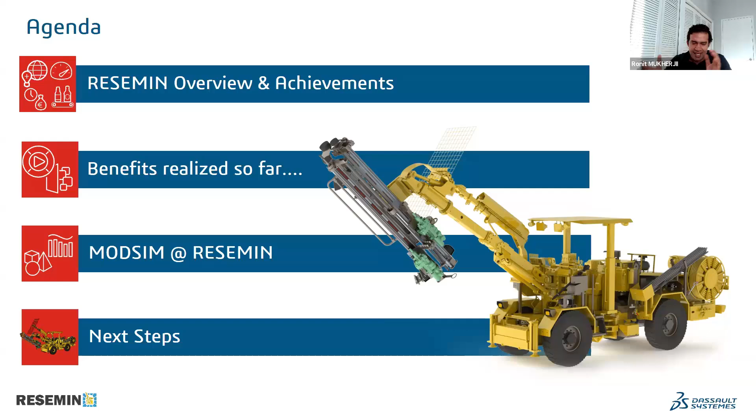What can I say? Resemin is a company here in Peru with about 1,000 employees between administrative people, engineering people, and manufacturing and assembly people. We have two factories right now, one in one part of the city where we cut the metal, make some welds, and paint the parts, and in another part of the city we have the assembly factory. We have the capacity to produce more than 20 machines a month, and we make sales all over the world. We have machines in Asia, North America, Europe, Africa, and Oceania.

We get 5% of the global market share.

In percent it's very low, but if you see the number of machines we're selling every year, it's very big for us. Five percent of the global market share - that's a pretty big number. It's not an easy number to achieve.

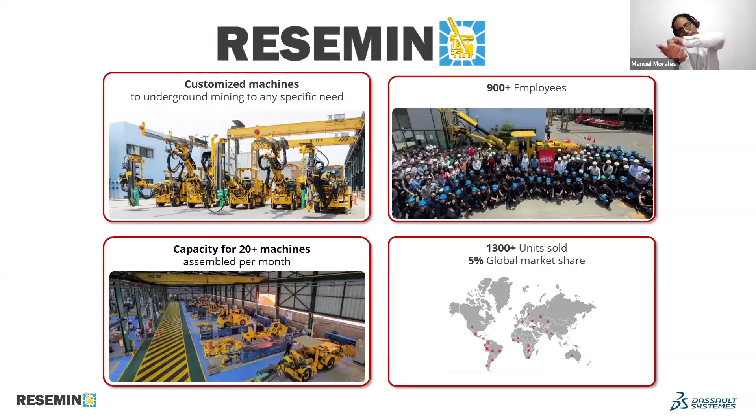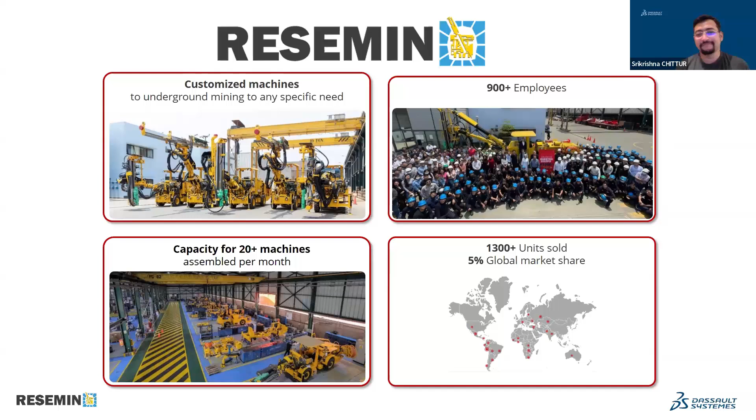And also these are customized machines, right? They're not identical to each other because you have different demands coming from different geographies. Yeah, our main sellings are customized machines. We actually have a standard, but we never sell the standard. All the time a customer comes and says, 'I need a long arm,' or 'the arm needs to drill this way,' some crazy things, and we have to develop these customizations for them.

Maybe tell us about your factory, Manuel.

I think his video is frozen. Hey Manuel, can you hear us? I think there's some issue with the internet connection. Maybe we can ask their employee in the meantime.

I can tell you this is the new plant, the new assembly plant, and they are producing more than 20 machines a month.

Manuel, are you there? Yep, sorry about that. So this is the new plant, right Manuel? Yeah, this is the new plant in Huachipa, Lima. If you can see, there are a lot of machines being assembled right now. Actually in this moment they are assembling some machines, and I have a lot of emails confirming the development of the machines.

You mentioned this factory line can do 20 plus machines at a time, building them. And you have to manage all of that - that's a lot of emails coming your way, man. I can understand that.

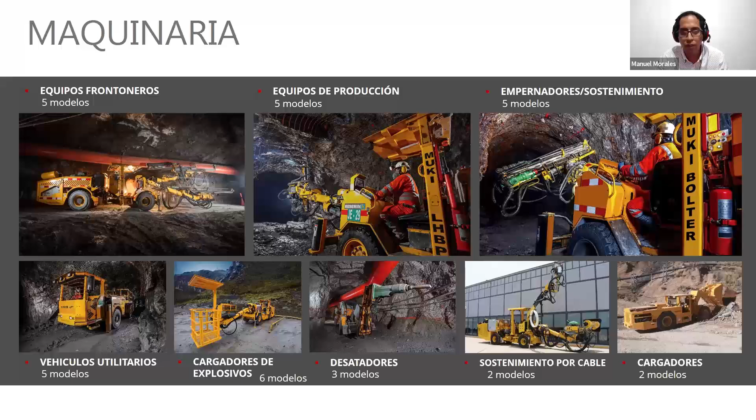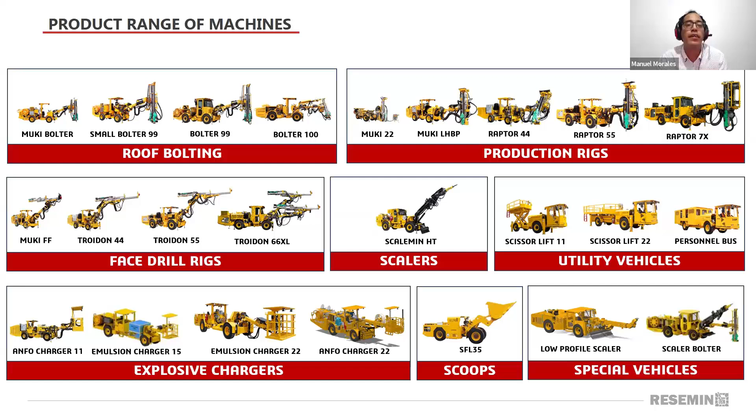If you see the next slide, please - you can see all the machines we are developing right now. This is our product range of machines. We have more than 20 kinds of machines. The next one is wider, showing our monthly production. Wow, that's a pretty wide range of machines you guys offer. Yeah, as I say, we have machines for every process that's done in the mine.

Maybe talk about the history of the company from a product development standpoint. For me this slide is my favorite. Manuel, tell us what's going on about your exponential growth in production - that is pretty amazing, especially in 2009. Explain just a little bit about that, please.

Yeah, we had very big deals in some years. In the first years of the company, we only made repairs and customizations of machines that were working in mines. But in 2002, one of our customers asked us for a little machine, and this was our first project of a real machine - the Raptor Mini, in 2002.

Then we started to produce some of these machines, and another customer said, 'Look, I have this machine that's bigger than what you manufacture, but I need one more similar to that.' So that started another project, making another machine. Then another customer said, 'I want this machine, but with this kind of work.' And with this, all the customizations started.

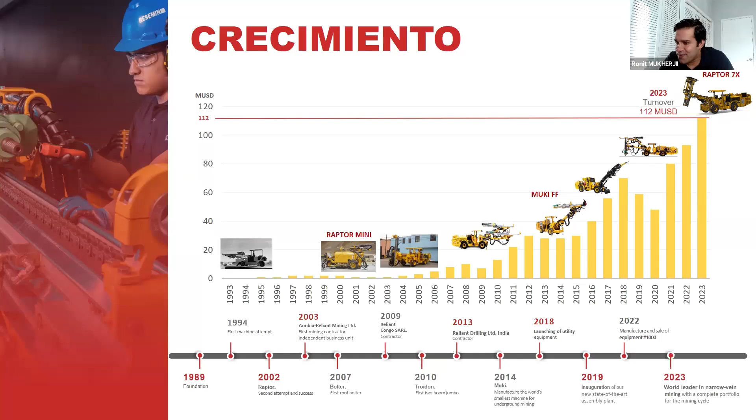I like that, look at their ramp up, it's like this. That's incredible. How was the growth of the company that quick, and the amount of engineers you have to hire? It's great to see.

We'd love to talk a little bit more about what happened when you adopted those simulation tools and SolidWorks tools, and how that helped. We'll deep dive into it a little bit later.

Tell us about your certifications and patents, Manuel. Yeah, we have some certifications in order to sell our machines in other countries. We have certifications of quality, of security of our machines, and operability of the same. All of these certifications are asked for by our customers in order to operate in some mines and in some countries.

Think about this machine: we have to make sure that the operator is still alive in all the work that he must do. I don't know if you remember, in Chile there was an accident in an underground mine. There was an earthquake, and the rocks dropped over the operators that day. The main idea is that the operator can still be alive, still secure, and make his work efficiently. That's important, human factors, making sure we are alive when we use these types of tools.

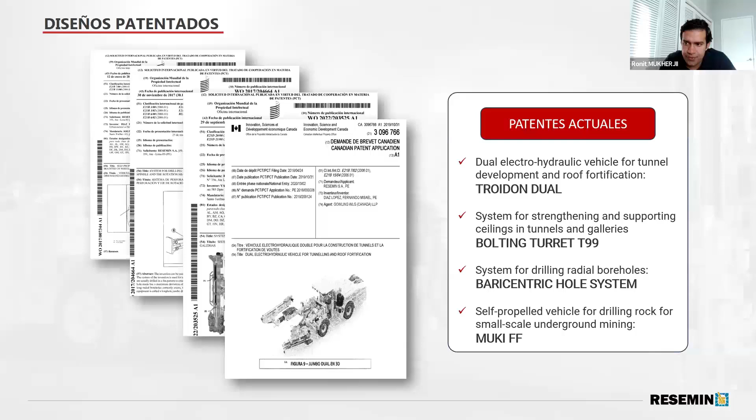That's important. Yeah, in order to get this kind of machine, and about customization of our machines, we have some patented designs. The most famous of them is the Muki FF.

This is the smaller one in the world, with just about 1.5 meters of height. So it's for very small mines, and this responds to the ask of many of our customers, not only here in Peru, but in Mexico, North America, and in Africa too.

Is the Muki FF the best seller out of your list of items? Is that the one that sells the most? Yeah, one of the best selling.

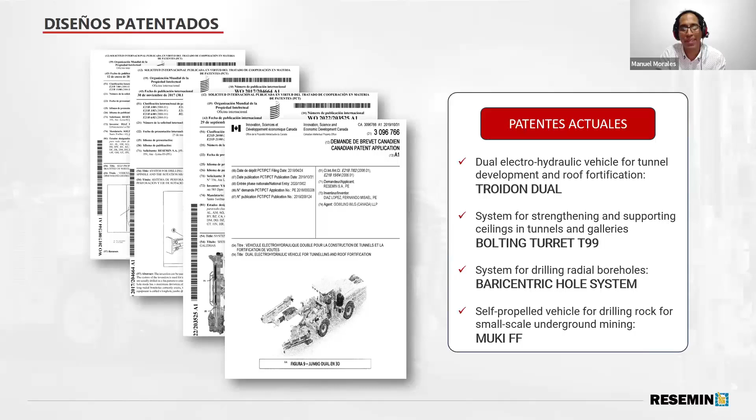Very cool. Can you tell us a little bit about your team? Yeah, in the engineering team, about 20 years ago it was only 2 or 3 people making some drawings in the beginning of the company. 10 years ago, we grew to about 10 designers. And with the growth of the company, the department grew too.

Right now we have 18 mechanical designers, 15 electro-hydraulic designers, 5 structural analysts, 3 bill of materials makers, and 2 people in codification. We have a lot of people working not only with the designs, but with the managing of the data too.

That's a packed team, Manuel. And I'm very curious, you said that 20 years ago there were 2 designers doing 2D CAD drawings, and even more, like in 2006 was when your first experience with SolidWorks or CAD was happening. From then till here, what does that journey look like for you? How did you start incorporating those tools and how did that help you? I'd love to hear a little bit more about that.

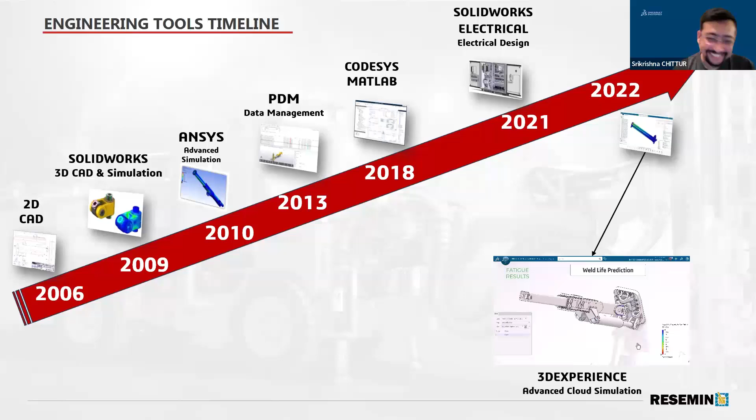When the complexity of our machines started to grow, the complexity of our tools had to grow too. There are 2 main tools for a mechanical designer and mechanical analyst in the daily work. One of them is the software, and the second one is coffee. So let's focus on the software.

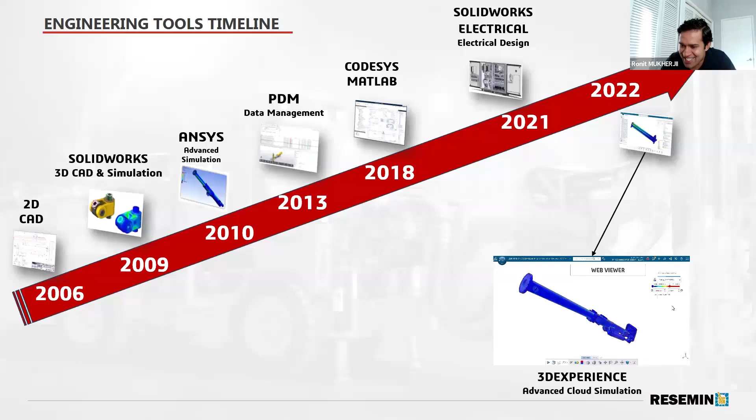I thought we were mainly going to talk about coffee, given how good the coffee is in your region. Yeah, I mean, we can talk about coffee too, guys. It's really good.

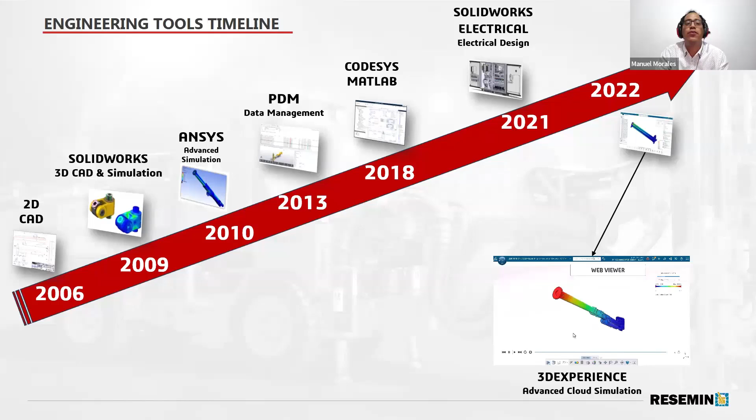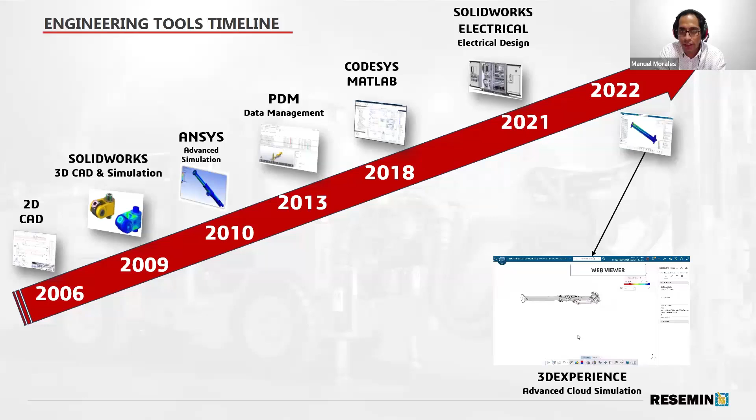So in 2009, we started to use SolidWorks 3D because we needed to put our ideas in a better way than only 2D. Working with drawings, it was very difficult to explain to our boss, to the CEO, how the machine starts to work. When we started to use SolidWorks, the way we communicated information to the other departments of the company got better.

Then we started to realize we're not only copying one machine, we have to develop a model of our own. At this point, we started to use simulation tools. Some years ago, we had ANSYS working in the company, but started to see that we needed more efficacy and we needed to be faster to get the results.

So we started to work with SolidWorks simulation in order to only make the modifications and rerun the analysis. This was a very, very fast way to develop our models.

At one point in our history, we had all our information only in a machine that worked as a server. It was a machine below the desk, if you remember that desk.

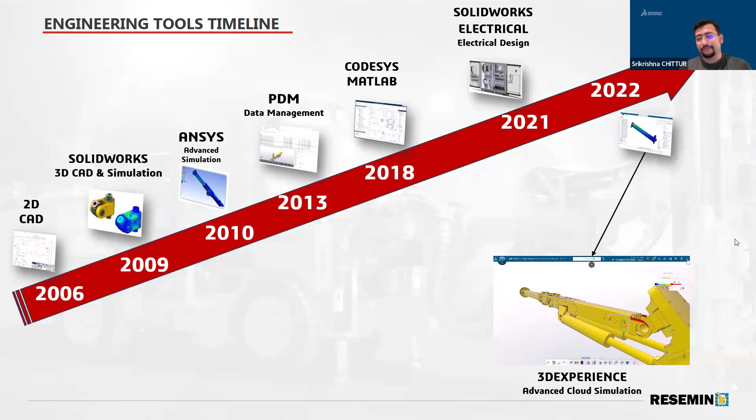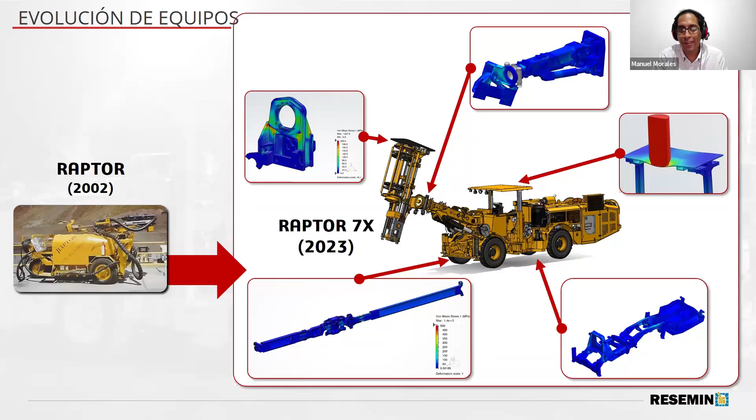Moving on, we could talk about one of the favorite pieces of equipment at Resemin and how it has evolved over the years. I love that name. The CEO of our company loves dinosaurs, so he took the names of some dinosaurs to name our machines.

Raptor is one of our most famous machines. The first image you see is the Raptor. Our first Raptor is a 1 meter height machine. It looks like a cockroach, but now we are making very complex machines like the Raptor 7X that you are looking at on the screen.

Actually, this animation of the machines turning is made with SolidWorks Composer. I was about to ask you that question. Yeah, all of our data and information is made in the platform of SolidWorks.

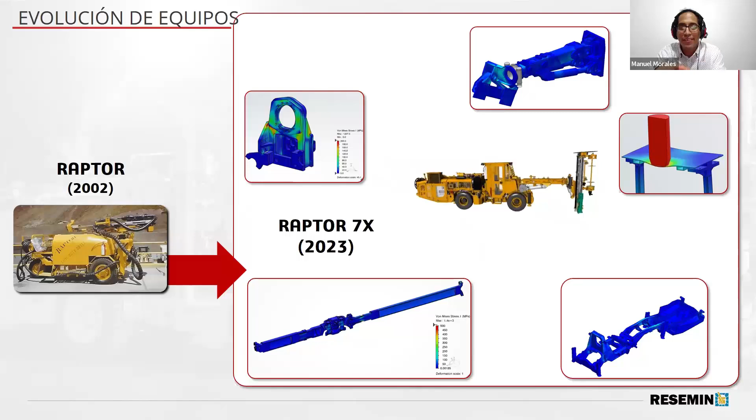With this machine, we have not only the most resistant design, we have electronic development, electric development. There's a lot of work from a lot of people in this machine. It's the biggest machine that we have right now in the development area. It looks like a transformer. I like the name, I guess something like that.

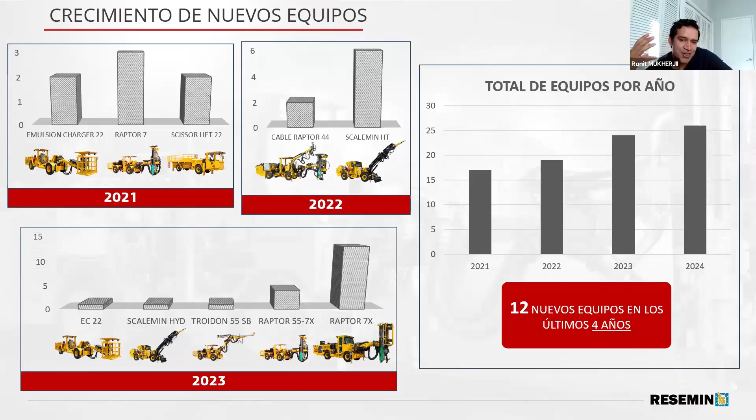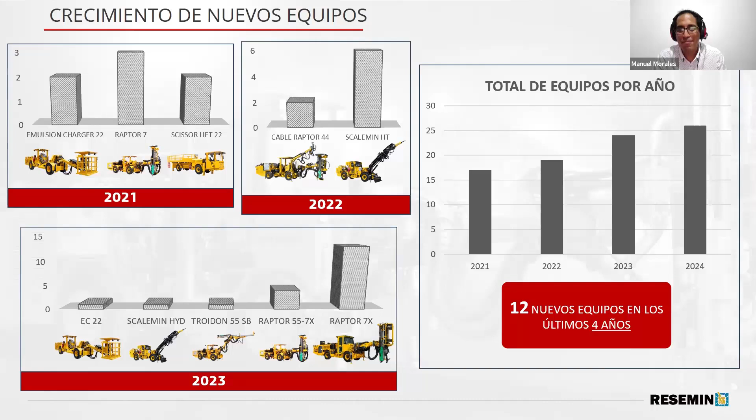Shurina, you know what I'm thinking? The CEO of Resemin is such a fan of dinosaurs, he's actually making all this machinery to go find dinosaurs inside, and this is just a ploy. That's the secret agenda, secret vision. Maybe one day.

Now I'm curious to ask the million dollar question we always ask all of our champions. You showed in your history the progression of product development. Initially there were some standalone simulation vendors and tools that you used, and then you switched to an integrated approach with SolidWorks simulation, primarily going with Dassault Systemes for simulation. What were some of the key reasons for going with this approach as opposed to a standalone point simulation tool, which might be extremely good at what it does, but why choose either SolidWorks simulation or 3D Experience Works?

First, we are not stopping to use standalone tools. We still working with standalone tools to make minor works. For example, I have to make a new support for a tank, and I have a designer working on the simulation of this component with SolidWorks. We don't need the power of cloud computing for just one support - it's like doing surgery on the heart of a bee, it doesn't make sense.

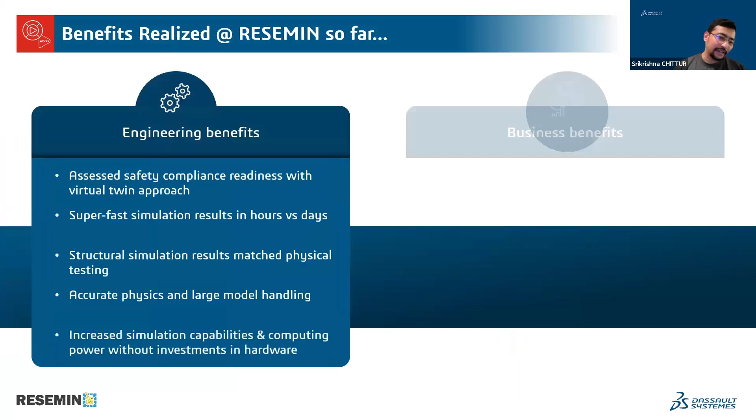Maybe we can take this opportunity for you to quickly tell us about some of the engineering and business benefits that you wanted to share with our attendees.

Yeah, as I said before, the main engineering benefit is that we have results in less time - very complex results in less time, and that means for the company less money spent on prototypes and physical tests.

For example, an FOPS test is about $8,000 to $10,000 for each physical test, and that's only the certification, but we also have to manufacture the components for this test - that's about another $10,000. So we're talking about $20,000 for only one test. Imagine if I have to make 3 or 4 physical tests for one machine. It's very expensive.

I'm imagining that because this is a certification test, you cannot fail at that certification test, right? Because if we fail, that means your time to market will take much longer, and you will lose maybe your business, right? Yeah, it could be 2 or 3 months more of development, and for our kind of customers, this time is very dangerous.

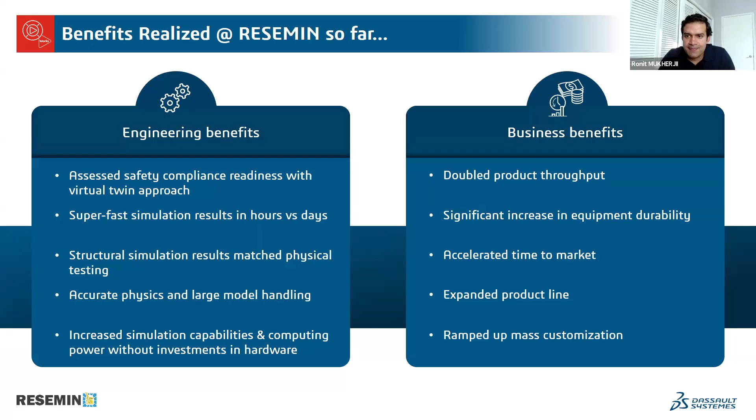Great, that's great. So just to validate, in terms of numbers - what Manuel was saying earlier, even if it takes $20,000 per test, instead of 5 tests, if you do one test, you've already saved $80,000, and that's just for one machine. There are so many machines being produced by Resemin, so it's a big multiplication factor. Yeah, absolutely, that's a great point.

Okay, speaking of safety, maybe we can quickly discuss how the unified modeling and simulation, or ModSim approach, has been adopted at Resemin, starting from requirements and collaboration and modeling and simulation. Tell us about the key requirements that you always like to talk about, which are critical to Resemin.

Yeah, for us, it's very critical to get components with good durability.

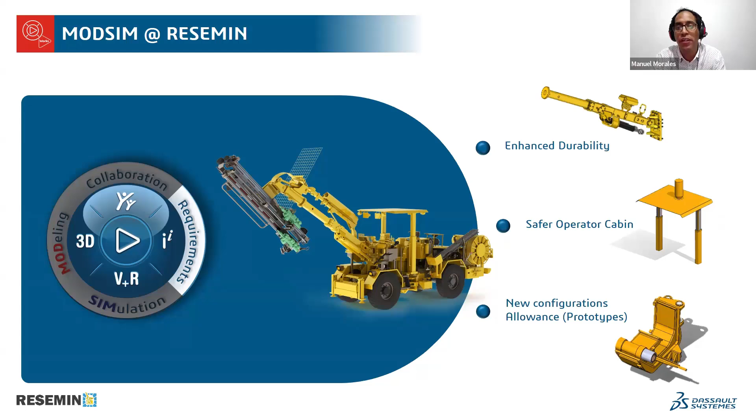Make the operator safe in our machine, and try to get new configurations in order to customize the machines to our customers. This is our main point of work for us in the engineering department. If you see the next slides, we are doing this with some kind of simulations, with linear statics, with durabilities, with optimizations, in order to get a...

Like we lost you there. I guess, right, as we were saying, in order to do that. Sorry Manuel, we lost you there for one second. Oh okay, I was talking about this.

That national holiday internet problem that happens everywhere. Everybody is watching Netflix at this time.

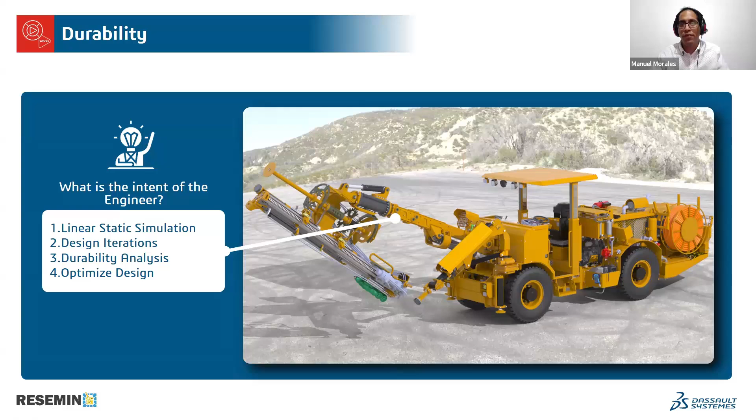Exactly, the complete system to the analyst. So can you hear me well? Yes. This is also nice, this is like one of my favorite slides.

And to answer Francisco's question as well, here's a physical test that we're doing. So of course we recommend running the simulations, bring the iterations down, we'll do one or two physical tests, and you have a working product. Tell us about this particular case, Manuel.

This driller machine, with this we are testing if the entire arm is ready for the work of the driller. The driller is shooting the rock with 3 tons, 48 times a second. Imagine that power in one driller, and the structure resisting this work, not only here on the surface, but imagine in the mine, when there are rocks dropping over the machine - very hard conditions for the machine.

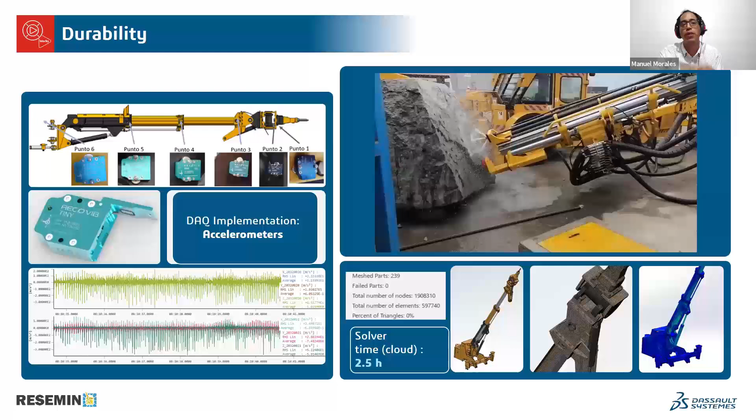So we have to get a very safe component. For this kind of simulation, we are using some sensors, accelerometers, to get real-time information about accelerations, and put that information in our simulation tools to get more realistic results. So this is why we are very confident that our first development is okay.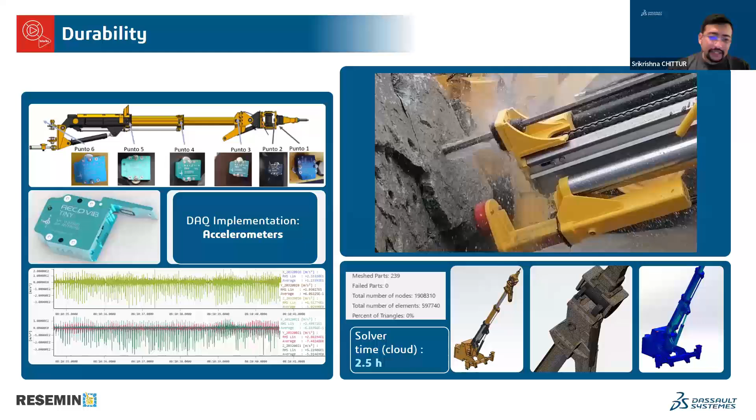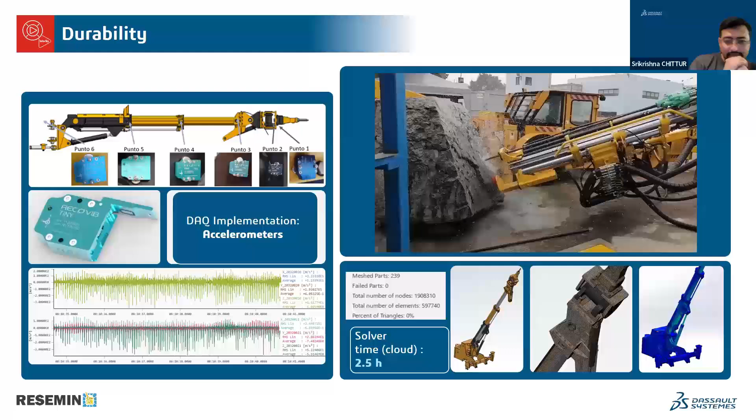So you're taking this real world data from these accelerometers, the loading data, and then applying it onto a linear static simulation to get a sense of how long the product is going to last - what is the life of the product? Right, exactly. And in a solver time of 2.5 hours, that's insane.

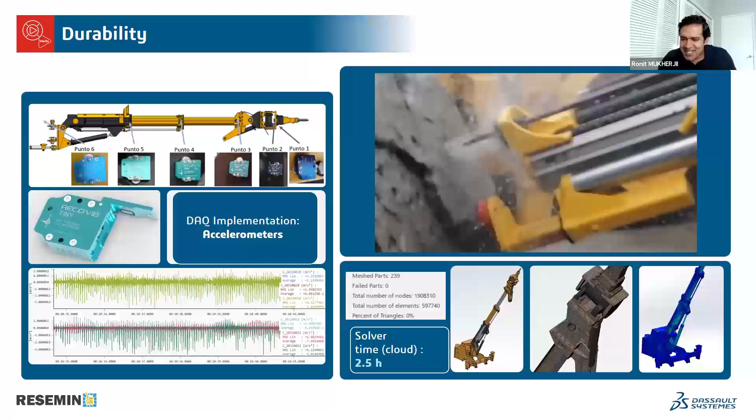I was just looking at the number - that's like 600,000 elements and solving in like 2.5 hours. That's not bad, that's pretty good.

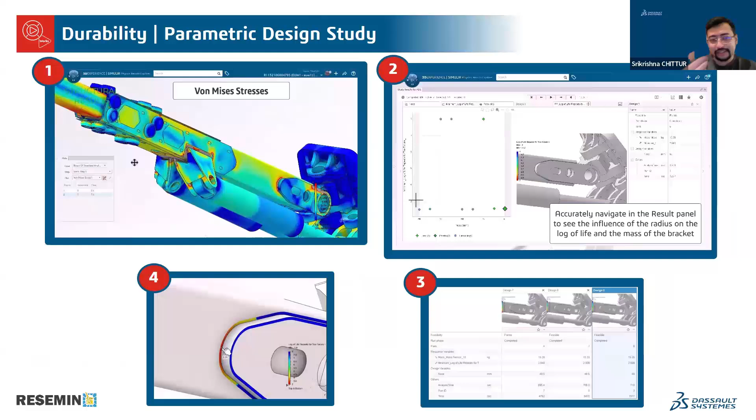And you also do a lot of parametric design study, right? Tell us about it. Sorry, you also do a lot of parametric design studies, right? Optimization studies.

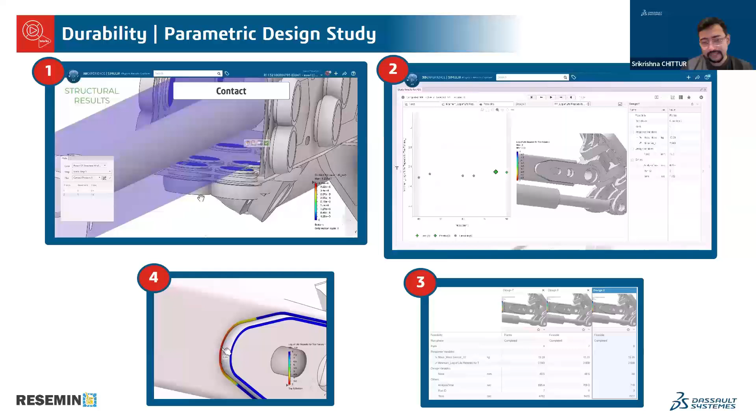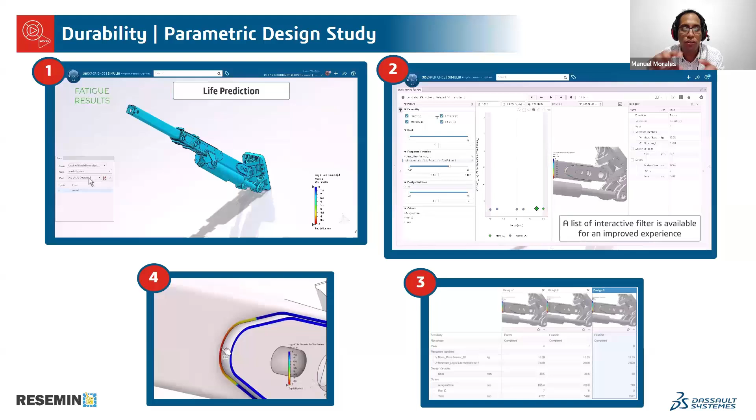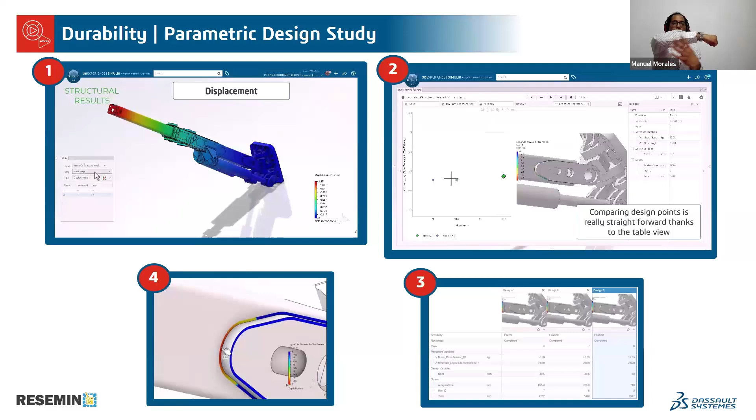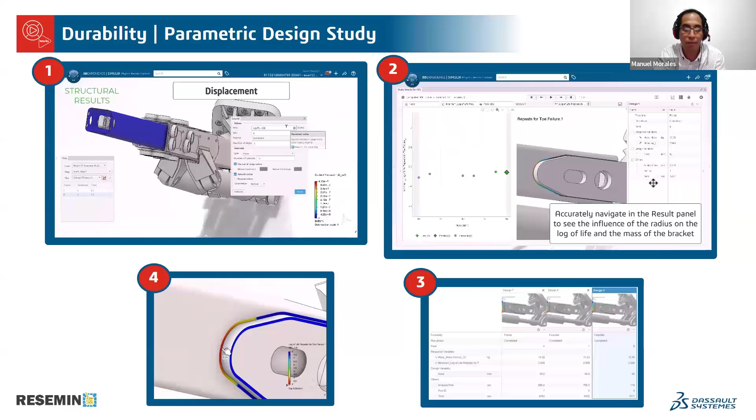Yeah, we made, for example, we parameterize some features - the size, the thickness of the sheet metals, the tubes, some components, the contacts. We parameterize some of these conditions in order to optimize, for example, the position of the regulators of the arm. If you see, this is a telescopic arm - this makes this kind of behavior. We have to make sure that the regulators put the arm in the correct position. So this parametrization is made with this kind of tools in order to get a very good final component.

Okay, makes sense. And moving on, tell us a little bit about the FOPS test - what is the intent of the engineer and what is the typical process? Okay, imagine that a rock of half a ton is dropping from the roof of the mine, and you are around that.

You don't want to imagine that. You don't want to imagine being that, running around to a safe place. I don't want to imagine that at all. So if the operator is under the roof, he will be safe from this accident. It's not like - do you remember Road Runner and Coyote? Ah yes, oh yes, when the coyote drops the rock - something like that, but with a safer component, with a safer machine.

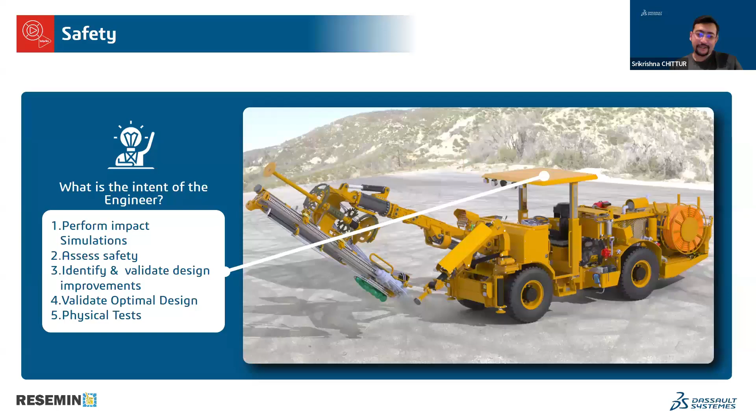Okay, and go ahead - so this is the physical test, right? Yeah, this is the physical test, and we make the simulation as well, and the results are very similar.

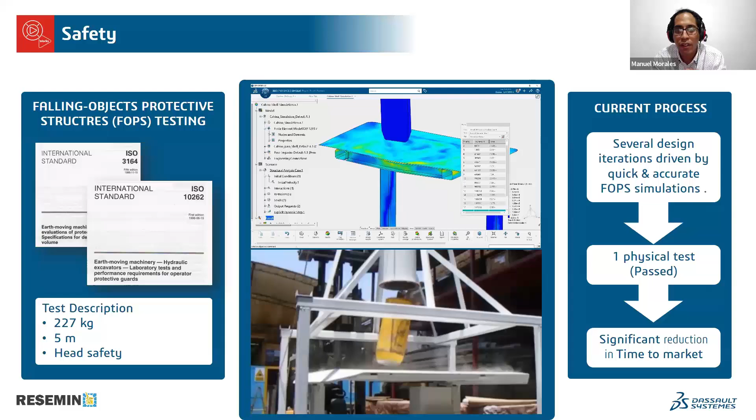Think about it - if in a physical test the result is a deformation of about 10 millimeters, in simulation we have 9.5 millimeters. So it's very, very close, the difference in the results. And if I get this accuracy in only 2 or 3 hours, for us that's great, that's the way to stay with the correct way of working.

Yeah, and for those of the audience who may not be familiar with this physics, it's very complicated. You have nonlinear impact happening, very short duration, and then there's contact. So it's a pretty crazy simulation. The fact that you're able to get it accurately spot on, I think credits to the Abaqus solver.

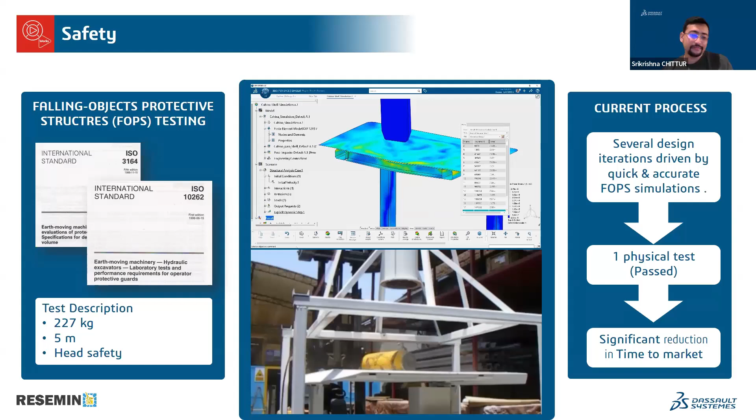Yeah, and I mean, I always see that comparison between that simulation and the drop test. That's a nice piece of eye candy, man.

I remember this case very well because Manuel used to use some desktop tools, and this simulation took more than 4 or 5 days to be solved. The first simulation was about 2 days. This was back in 2010.

And at that time, we delivered the full power of cloud computing using 100% power, and it took 15 minutes. So yeah, it was crazy.

I remember you, Manuel, and Fernando asking about time, and he couldn't believe the amount of time he could reduce for production, and not only simulation time, but the ability of running more models. Because if a model takes you 2 days, there's no way to try more than 1 or 2 models.

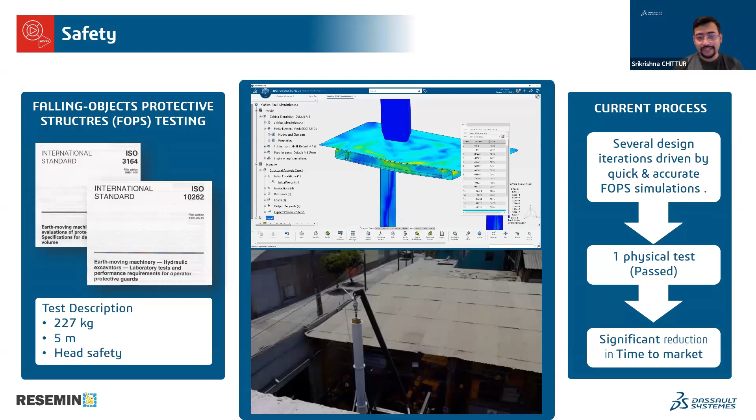And what about the fact that when you run a simulation on the cloud, you can send it and still be productive as an engineer in your day-to-day stuff. You're still doing your work. Whereas if you're running a pretty intense simulation that bogs down your laptop, you're not doing any work, you're going out for lunch and coffee.

At that point you can only pray. Pray and please, runs don't blow. So, yeah, no, all great points, that's a good point too.

You're not locked to your machine, you're not locked to your application. You can continue working on design while the simulation is uploaded to the cloud.

Okay, gentlemen, we are almost at the edge of the hour, a couple of minutes left. Manuel, we wanted to hear from you. You've come a long way in developing simulation processes, leveraging unified modeling and simulation at Resemin. You always talk about democratization, empowering designers with component level simulation so that you as an analyst can focus on more complicated, complex things. Tell us more about it.

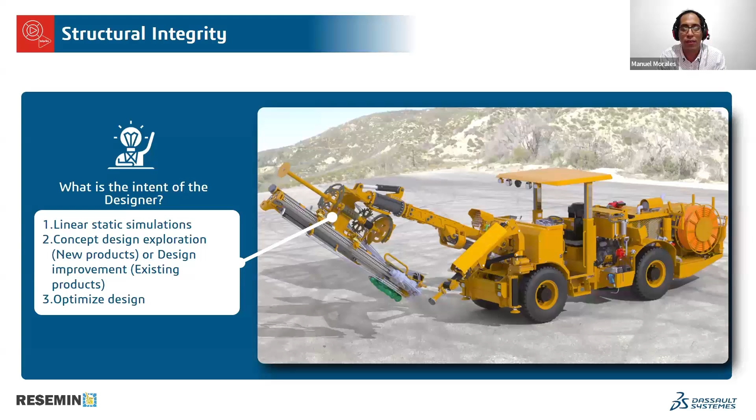Right now, last year we were only two people working with simulation. This year we started a team. We have 5 people only developing simulations, and the rest of the designers are starting to use SolidWorks simulation in order to get their own results.

We are spending less time developing the simulation because the designer is starting with that, and we only have to make 1 or 2 iterations to make sure the results are correct, and then launch the information to the drawings for production. It's a faster process for us, and we are more efficient than before. This is what we are doing with the designing area in Resemin.

We're getting better results, we are getting better designs, and we are spending less time for each product. Yeah, makes total sense. So your designers are using simulation upfront at the component level for some of the simpler analysis, so when you get the assembly, it's already in a much better, more optimized shape.

Spending less material reduces the cost of the machine and the process as well.

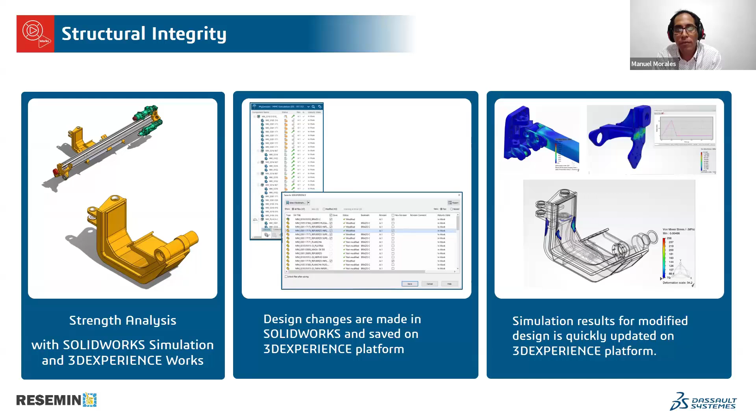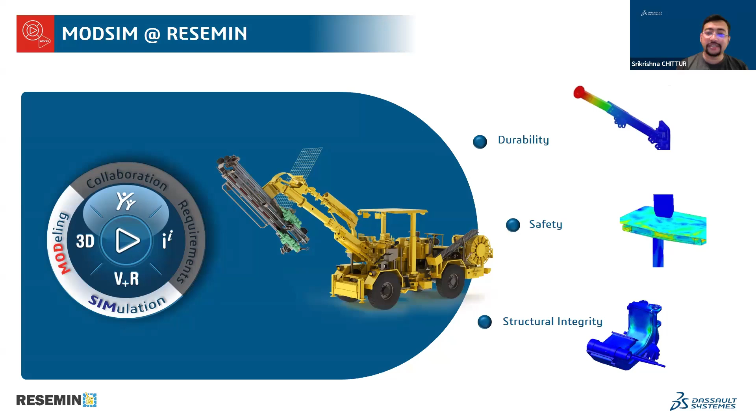All right, let's wrap this up. Clearly you talked about durability, safety, being able to pass compliance with mostly virtual validation and just one physical test to pass, and then democratization of simple structural analysis. Let's talk about your future projects and then we can wrap up today's session.

Yeah, sure. We are working right now on optimization of our cabins, our closed cabins, because most of the mines around the world are starting to work with harder ambient conditions. So closed cabins are more popular, and we have to make sure the interior of the machine is controlled.

The operator will not become a roasted chicken. He must be fresh in his work, not a roasted fish. Fresh and happy.

So the air conditioning of the cabin is very important for us. We're thinking about working with fluid simulation using CFD, and with electromagnetic simulation too, because of some electronic development and electronic components in order to get information.

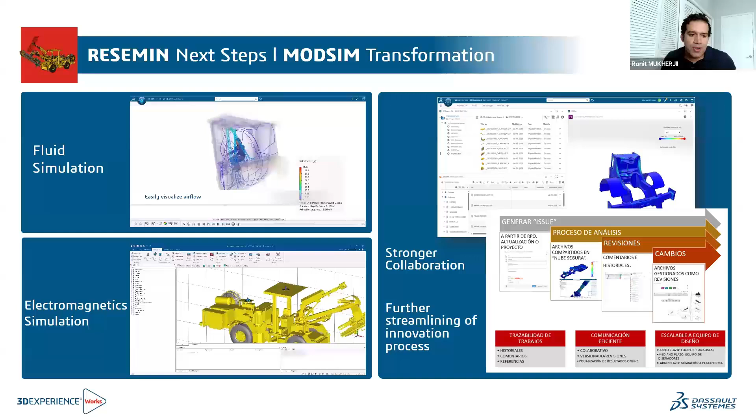With the tools we have at Dassault Systemes, we have a lot of tools, and sometimes you might not even know what we have. So it's great to understand what our portfolio looks like. We don't just do structures - we do CFD analysis, electromagnetics, plastics injection molding, and quite a lot of stuff. So it's great, Manuel, that you're always reaching out and seeing what technology we have and what you can use on your end to optimize your design. Thank you for sharing this journey and this knowledge with us.

And you have the power of Mr. Jose Pereiras, who's like half employee of DS, half employee of Resemin.

We have a lot of fun with Manuel. It's amazing what these guys do. So it's a pleasure for me to learn from them every day, and the product they develop is pretty amazing. Thank you, Manuel, for being here and sharing your knowledge - it's very useful for us.

Thank you for the opportunity for this webinar and the opportunity to show what we are doing right now.